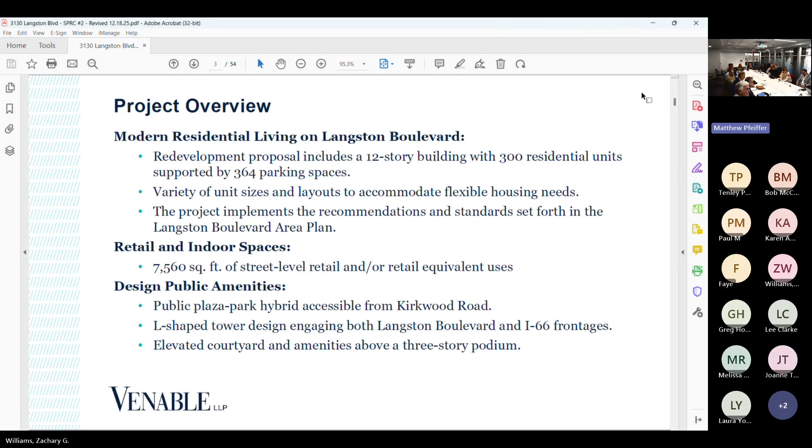The project hasn't changed much in terms of the overall scope. The number of units has come down a little bit, down to 300. Mostly everything else is the same. There's obviously some changes we'll talk about tonight, but the overall programming of the project has not changed much since the last SPRC.

The agenda tonight: we're going to quickly work through our building and architecture changes. Could you adjust that so we can see the top of the slide? Hold on just a second. Oh, I think that did it. Okay, can everybody see that?

So we're going to work through the building and architecture changes quickly. We'll then talk about landscaping and some of the changes to the Plaza Park hybrid. We'll get into transportation, stormwater overlay relief, and then we'll have a staff presentation. We'll also have questions and discussion and conversation.

So getting into architecture, I'm going to turn it over to Steve Saff at DCS Design to discuss architecture changes.

One of the major things was stormwater, which required us to shift the base of the building on the east side over by about 10, 11 feet, which forced us to look at the circulation in the garage and push the North Kirkwood side out further to the south.

Another major thing is stormwater management, to get all the retail lobby and everything along Langston Boulevard to be at the same elevation, which created a situation at the very northeast corner of the building where we had to provide steps, and then ramps both along Langston Boulevard to the west, and a ramp going down to the south off the corner.

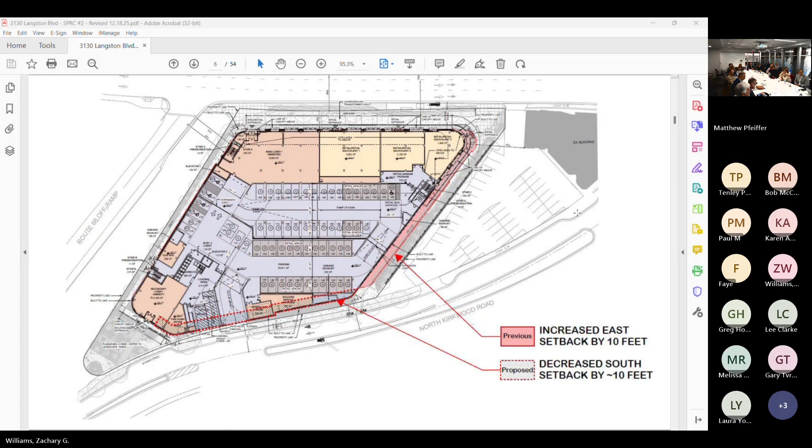Again, a lot of the architectural images have not changed much. You will see the biggest differences at the base of the building along Langston Boulevard and the facade along North Kirkwood.

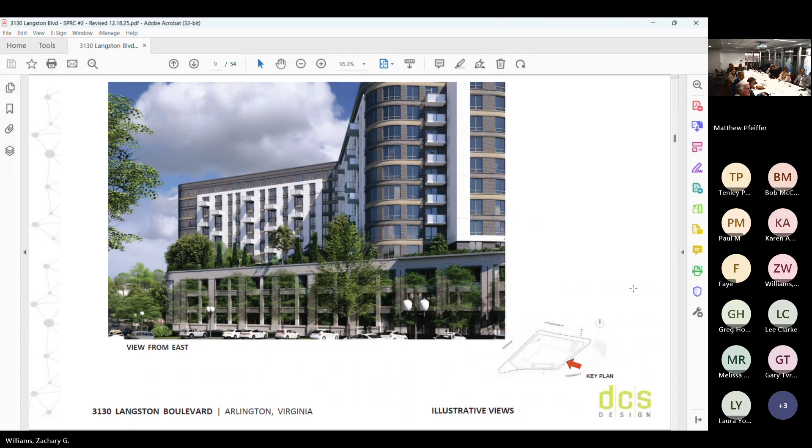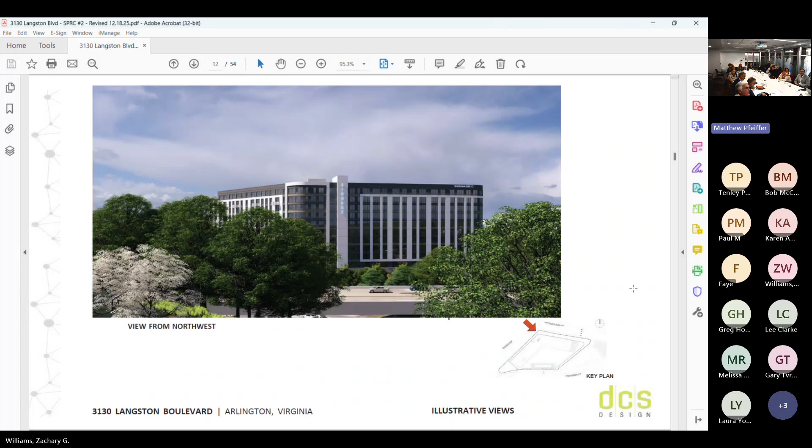Just looking from the pawn shop site to the west, east elevation. And that's just looking from the pawn shop to the southwest, at the intersection. Keep going through most of the images you've seen.

This is the changes to the North Kirkwood elevation. Really the whole building, the base of the building, the architectural style, the articulation, and the treatment of the materials carries around the whole building, so really there is no back of house on this design.

There is a step in the building, shifted back. We tried to push it wherever we could to get some articulation of the side, and we tried to treat certain areas a little differently in the opening. So we do have glazing back there, but we also have decorative screens, artificial greens, and other things to give the whole south elevation a different look.

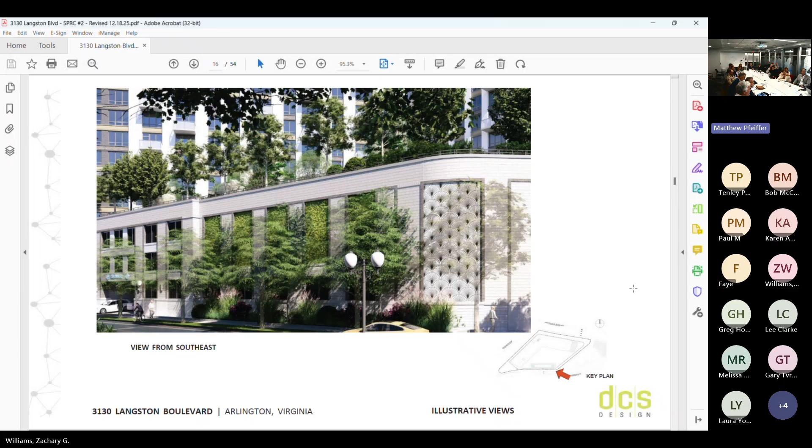That's a change as well. Here you can see at the very northeast corner, that's going up to the retail. The steps going up, a difference of grade of about 30 inches there - so that's obviously a big change.

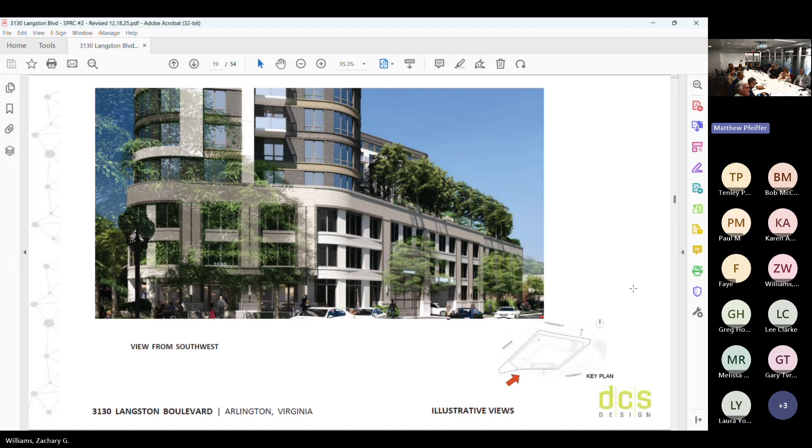And that is the southwest corner, with a change there. And then that's the other lobby on the North Kirkwood side. This is looking at the elevated courtyard. Andrea will talk about the plan design.

This is just the retail from the lobby to the north looking east. I think the change you can see here is that elevation - there's a really loud air handler in this room, so you can see a change here.

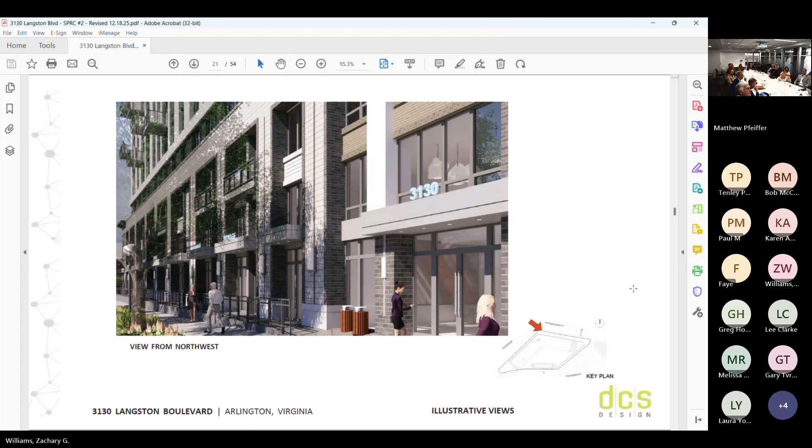Just to point out that ramp - it starts at the lobby and then works its way along as the grade drops to the east.

Basement level garage. Ground floor, all retail lobbies to the north, and then at the very bottom corner is the other lobby, the secondary lobby.

Typical parking level, and you can see that the hatched area is where you have a double height space for retail along Langston Boulevard.

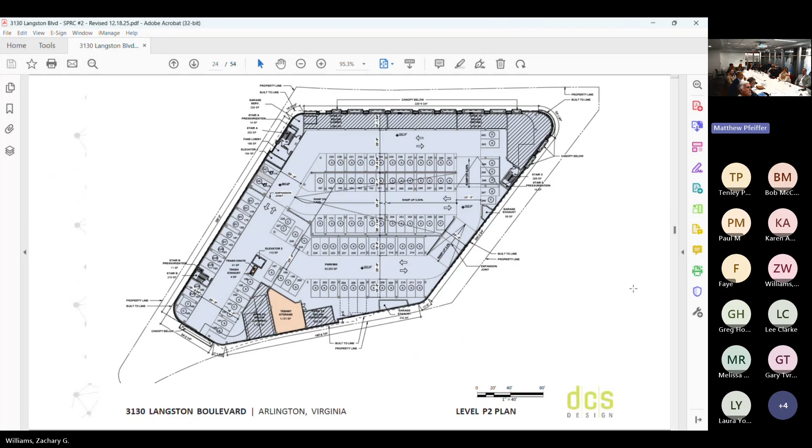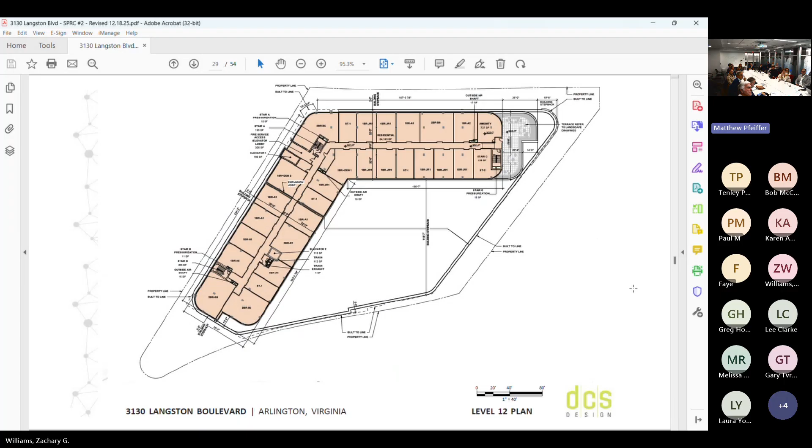Top level of parking - it's the elevated courtyard level and amenities area. Typical level, typical level, and then one last slide where you have the terrace at the very east corner, stepping back.

All right, turn it over to Andrea. Sit in my place.

A decent amount of the architectural changes came from civil improvements that Mike will also be getting into as well.

Hey everyone, I'm Andrea Crossett with Land Design, landscape architect on the project. So this is an overview of the project - you can see it's very green, but I'm going to stay mostly on the stuff that has changed since the last SPRC. You can see the key concept notes here.

One of the things we heard during the last SPRC is that the Plaza Park hybrid felt very disconnected and not integrated, so we worked on a new design, which I'll get to in my next slide. You can see street tree layout revisions along Langston and North Kirkwood, which, like Cassie just said, are really civil and stormwater management related, so we had to adjust some things as we responded to those changes.

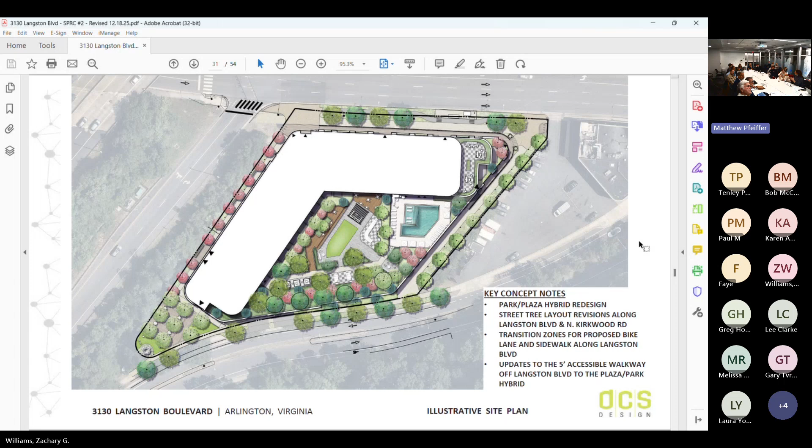The plaza level 3 design hasn't changed at all. But the other thing we heard at SPRC was that the northwest side, or the whole west side, that connection from Langston down to the park felt very tight. It felt too lush, like there was too much going on in the views. So we tried to adjust that a little bit, and you'll see in the views we also provide lighting imagery to show that it's going to be inviting and welcoming.

So the Plaza Park hybrid - what we heard was it felt very much like against the building was Plaza, and then it went to park. We tried to integrate those elements where, it's a 5,000 square foot space, so it isn't a lot, but we wanted to make sure we had enough for everyone in terms of all the requirements per the Langston Boulevard area plan. We introduced a bosque, so we increased tree canopy through the bosque design, revised accessible pathways with revised planting layouts, additional seating, areas for refuge. We'll get into the levels and ramping and why that happened, but this is just a response to that feedback. We made sure there were areas for open lawn, for open recreation. There's a little sculpture at the southern west point, and increased lighting and safety throughout, which we'll show.

What is a bosque? A bosque, you can see that very geometric shape - that's just a landscape term. You'll see it in places like New York, Bryant Park, places that are very urban, but you're trying to get as much landscaping in and integrate both the hardscape and landscape together.

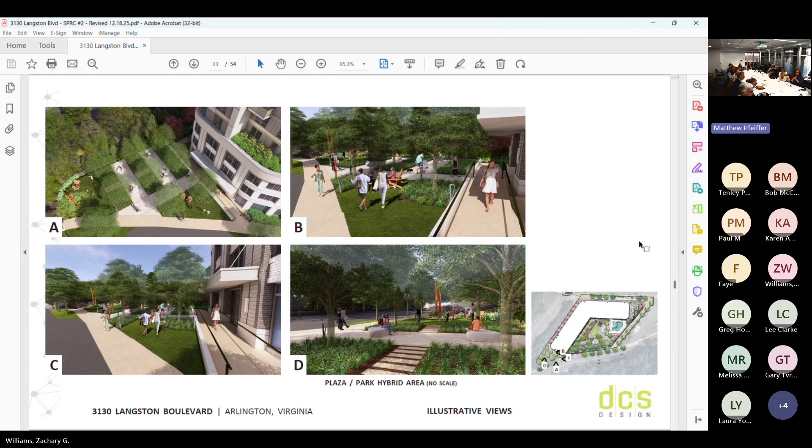In these views, it's a little dark, but these are just updated views showing those spaces where, in the lower right-hand image, there are areas for you to sit, to recreate, to gather, to stay, to play. We tried to integrate as many items as possible per all the requirements of the design guidelines. Again, making sure it feels welcoming and well lit. Something we also have to do, because it is a public space - it's privately maintained public space - is make sure it feels welcoming, that you can come anytime, at dusk, walk your dog, things like that.

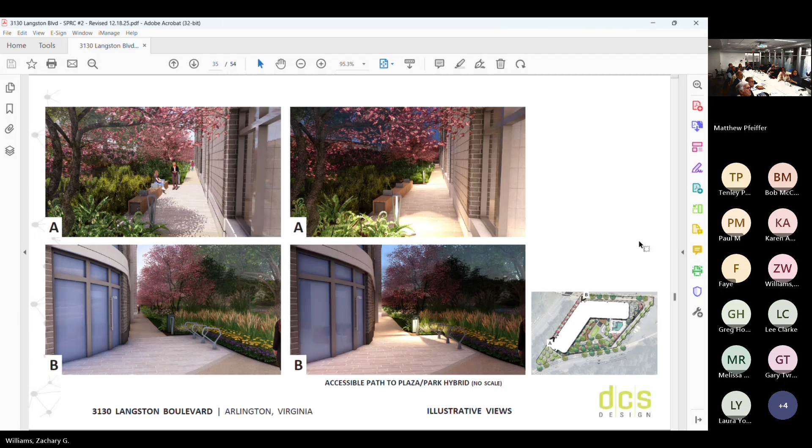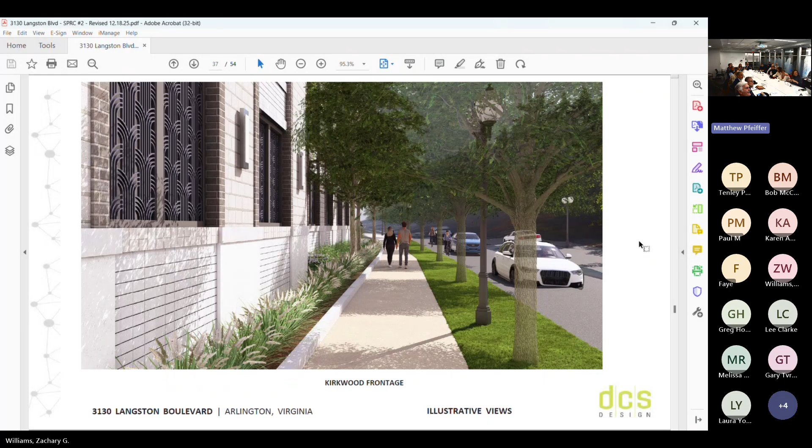These are some images from when we were speaking with Jackie and folks two days ago, making sure we brought back some of these same images that haven't changed - this is the North Kirkwood side with that textural demonstration Steve talked about just a few minutes ago. Again, same Kirkwood frontage, showing the greenway, which we can - I'm not going to get into any of the storm management.

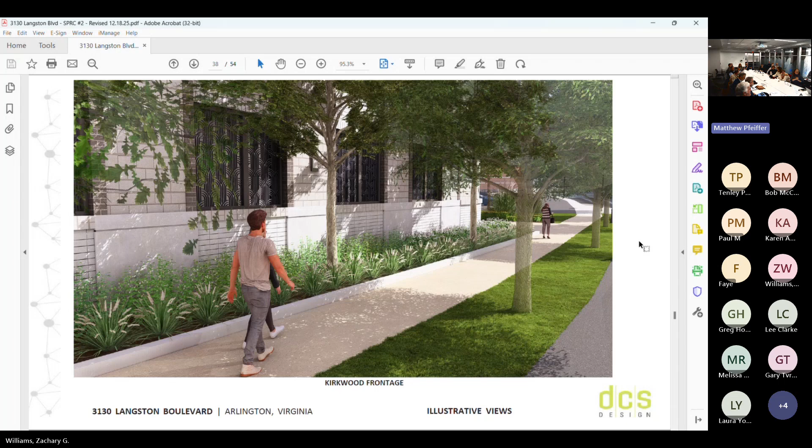I'll leave that for you. Okay. I'm really sorry with this pen.

I'm Mike Pinkowski again with VIKA. I just want to reorient everybody from an access perspective. The blue arrows represent the existing access points. Today the site has 3 access points: 1 on Langston Boulevard, 2 on Kirkwood. The eastern, or road right, access point on Kirkwood is where the existing median break is today.

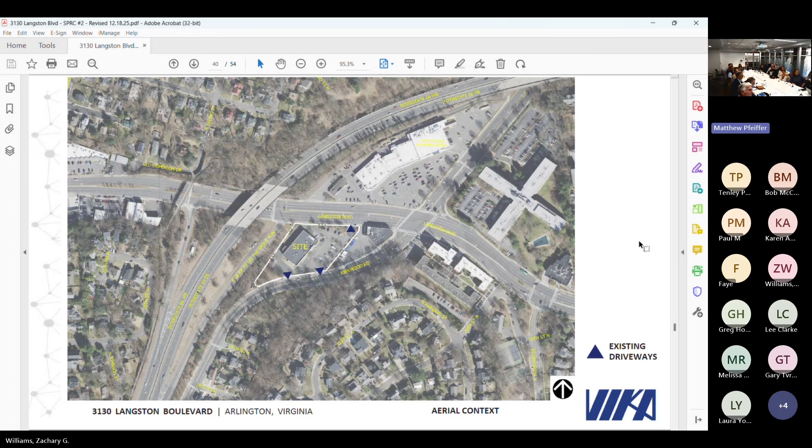The next slide highlights some of the multimodal infrastructure that's being implemented.

Starting with number 1 in the bottom left, that's where the proposed driveway location is going to be. We're going to consolidate the 3 driveways to a single access point. The red triangle represents the loading dock, and the blue represents the access to the garage.

At the I-66 off-ramp, we will be providing new ADA accessible ramps at that location. Number 3 represents the improved and planned Langston Boulevard streetscape.

Number 4 is an improved bus stop. There is a bus stop there today; we will be adding a shelter at that location.

Number 5, the number that's kind of floating off, there's an existing utility pole in front of the pawn shop. We'll be bringing that down with the development to improve that very narrow sidewalk today. It's very tough for anybody to even get by because of that light pole.

6 and 7, and Andrea kind of touched on this, represent the north-south connections, sidewalks and buffers along the boundaries of the property.

Number 8 is the streetscape along Kirkwood, and we'll get into the sections in a minute.

Number 9 represents the PU/DO parking spaces that will be provided with the site. I know there's some concern about the number of spaces. There's an opportunity to potentially add another space underneath, but it would come at the cost of a tree in that location. I'll also note that while it's on the other side, there's about 16 parking spaces on the north side, northbound side of Kirkwood, and then along the pawn shop property southbound there's an additional 4 parking spaces.

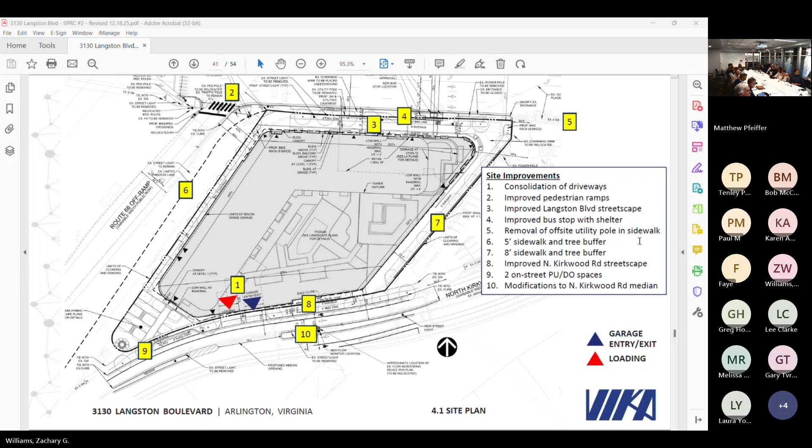I guess a question - can we hold all questions until after they do their presentation?

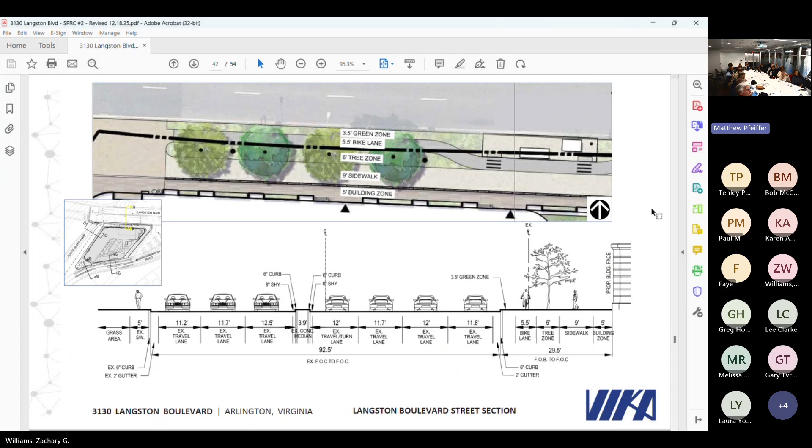This is the Langston Boulevard streetscape and plan view on the top, and then a section on the bottom. The section on the right-hand side is our side of the street: 5-foot building zone, clear sidewalk, tree zone, protected bike lane, then a green zone between the bike lane and this.

We're not adding traffic to either of those movements. As part of reviewing the timings of that intersection, we did identify an opportunity to optimize the traffic signal timings to help the overall delay of the intersection, mainly giving more time to that eastbound left on Langston Boulevard, so it can help process the heavy left turn, especially in the PM.

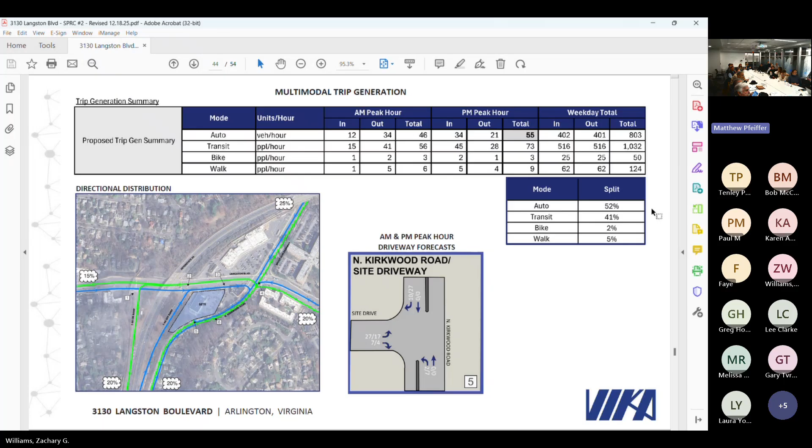Again, that's another opportunity for pickup drop off - the Ubers, the Uber Eats, the pizza guy. If those parking spaces on the street are occupied, they could pull into one of those spaces. The garage won't be gate controlled at the access point, so they'll be able to come into the garage.

We're meeting the parking requirement for bicycles, both secure parking and class 2 or 3, the ones surrounding the site. We will be providing 2 loading berths; there is a requirement for 3. A third is kind of related to the retail component, but we believe that given the uses planned, that two spaces should be adequate.

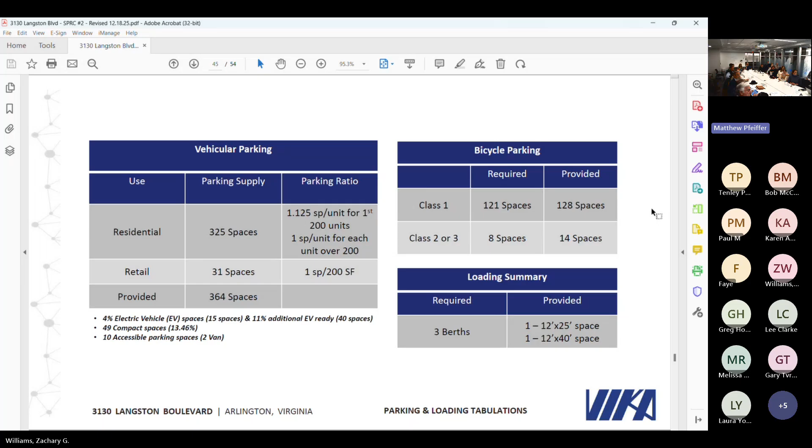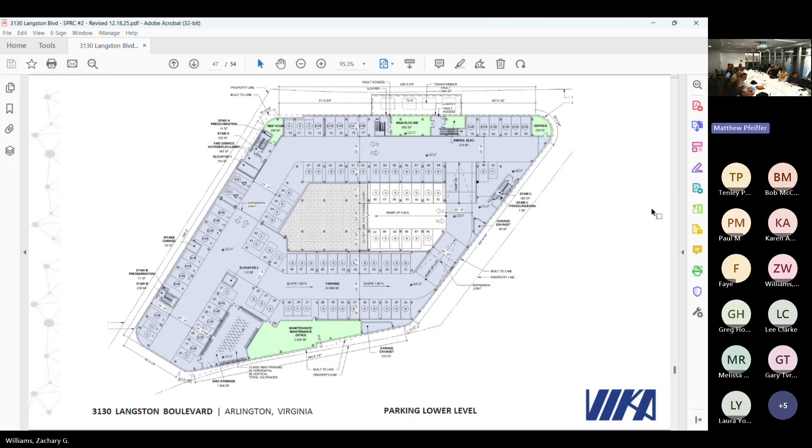And this is the lower level. I just wanted to show this again. On the bottom left, that's the big secure bike parking area for residents, and there is an elevator in close proximity to it.

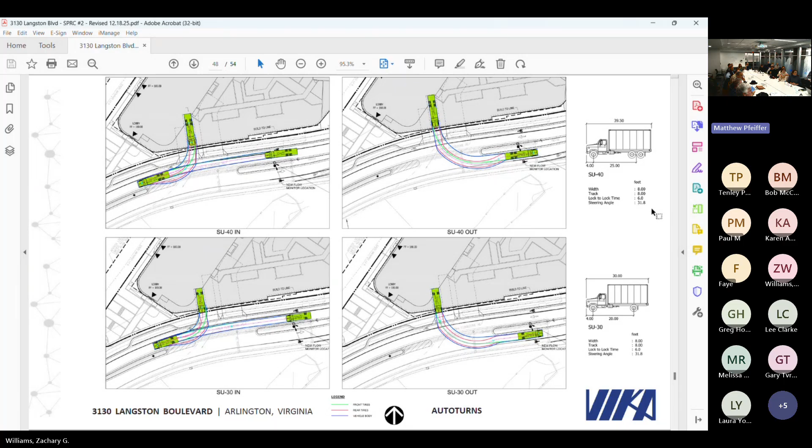And the proposal will be subject to a transportation demand management plan. These are the typical requirements that are laid out in the standard conditions, and we will work with staff post approval to implement a plan.

Thanks, Andrea. I appreciate it. Hi everybody, my name is Chris Champagne. I'm an engineer with VIKA, and I promise I only have 3 slides. But I do want to talk about 2 very important topics: one is stormwater management, and the second is flood mitigation and overland relief.

The first slide is simply a discussion about stormwater management, how we're going to deal with our water on our site. I'm talking about the water that falls from the sky, lands on our property, and how we treat, detain, and control it prior to releasing it into the stream, Chesapeake Bay.

The site obviously is developed today, but what we're trying to do with the new development is use what we call runoff reducing stormwater techniques. So we're going to try to grab that water, hold it and leave it here locally, let the plants take it up, let us use it on site and not discharge it immediately into the stream.

So you'll see some green roofs that Andrea helped me with. Andrea and I worked hard, you make pretty green roofs work for stormwater management. And those areas that we had to have a harder roof, we use what we call rooftop disconnection to a stormwater planter. So Andrea and I were working together in the orange areas and the green areas and the light blue areas to capture and treat the rainfall that actually falls on our site.

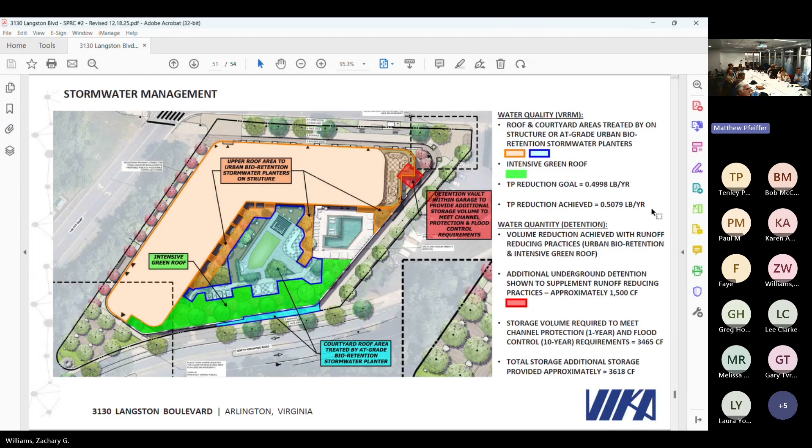So there's a series of culverts that start at Kirkwood that go under the pawn. One of them actually physically goes under the pawn shop. The other culvert goes right between the pawn shop and us, goes under the parking lot at the Giant, down Spout Run Parkway, and takes it to the Potomac.

So that 830 acres is what we have all been working on together. I'm taking all the credit right now, but they really worked hard to help us find a solution that could work not just for our project, but for the community at large. So what we were able to do when Steve magnanimously allowed me to make his building a little bit narrower is we were able to create a 20-foot wide, almost pathway for the water.

So what we've done by narrowing our building is created an opportunity for that water to safely get through. We've also, thanks to Andrea working with the landscape plan and Cassie with a wallet, put in an 8x8 box culvert. So this is a culvert that's taller than me and wider than me, that's going to sit under that 20-foot wide pathway so that we can extend the culverts in the future, expand the capacity of the culverts to handle that water.

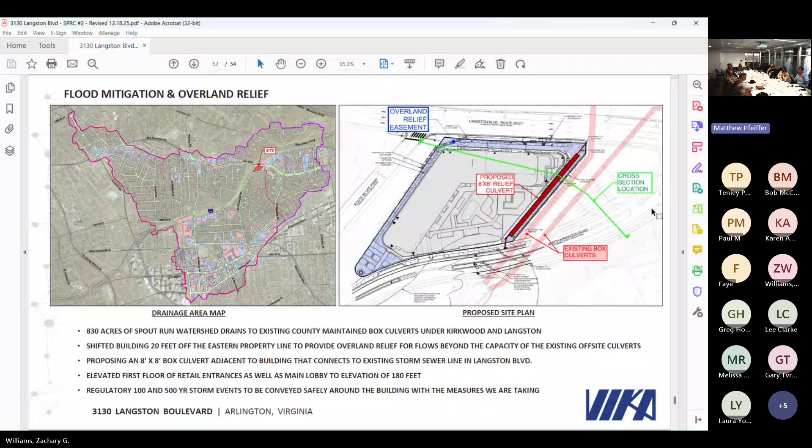So we've done everything that we can to work with the community to try to create a building that can work today and work in the future.

So I kind of batted last as the last guy going, but it was really all those guys who got on base who allowed me to deliver the speech today.

But if you guys have any questions, I'll be here.

Did you want to mention, Chris, that this also shows the culvert in that area? Well, I thought it went without saying because it was big and red, but yes - underneath, that's the 8x8 box culvert underneath the site.

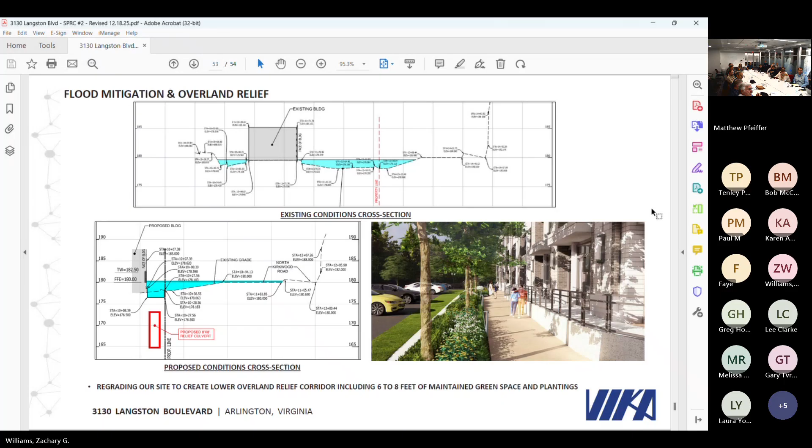Yeah, we'll take questions in a minute. Staff... yeah, because everyone wants to be architect.

All right, sorry about that. Give this a second to correct itself. We'll get to questions in a second, guys. Let's let Mr. Pfeiffer do his presentation.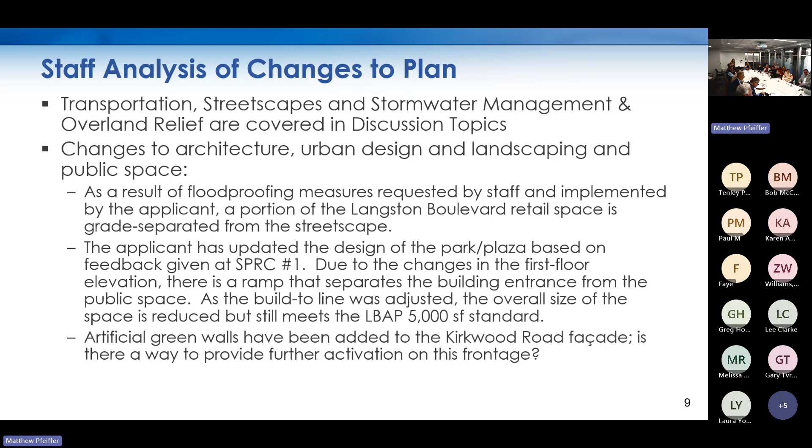And then finally, we did notice that the artificial green wall has been added to the Kirkwood Road facade, and we just ask, is there a way to provide a little bit further activation on this facade? We understand that this is the parking garage—they've done a lot of things, including decorative louvers and these green walls—but we'll keep working with them on that.

And then this slide sort of illustrates those points here. You can see the green walls on the Kirkwood frontage. You can see here this ramping system at the park, with a small seat wall that separates the park from the ramp and into the lobby here. And then finally, this is a little bit small, but you can see there are stairs up to the 180 feet of elevation at this retail corner.

So before we get into the discussion topics and I hand this over to Bryce, I wanted to tie us back to the online engagement that we did almost a year ago and just repeat some feedback that we've already heard related to these three discussion topics that we're going to have tonight.

So on stormwater management, we heard from SPRC members that they were looking for a little bit more clarification from staff on whether they are in conformance with the recommendations of the Langston Boulevard Area Plan on overland relief. We're happy to talk about that this evening. From community members, we heard a common refrain that consolidation could help solve some flooding issues. We also heard that there was a concern that the 50-foot required overland relief corridor was not provided. And then we also heard general concerns about flooding in the area, acknowledging that it's not necessarily a Rooney issue as much as it is an Arlington County issue.

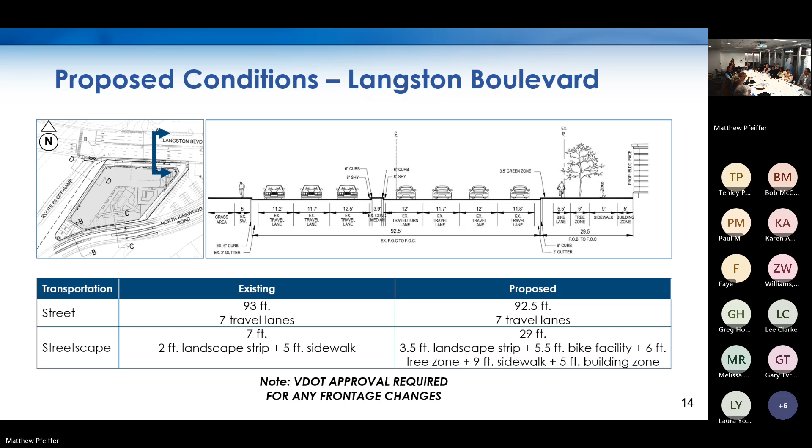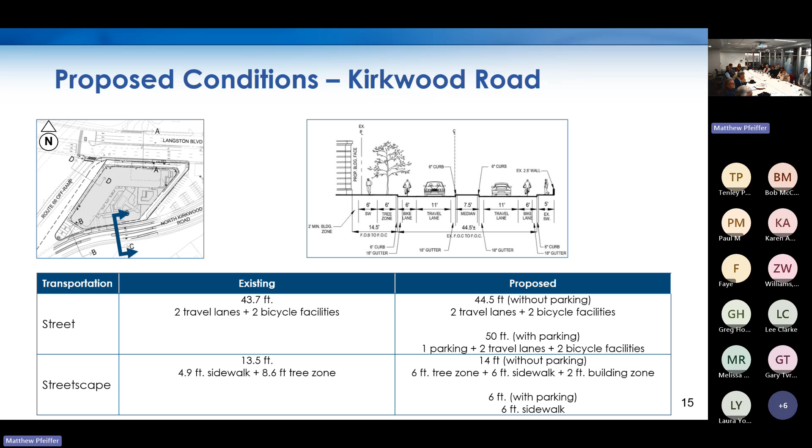This led to an extensive design process where the applicant worked with staff to assess the site's existing and proposed conditions under the 100-year storm—that's the 24-hour period with a 1% chance to occur in any year. Based on the county's stormwater modeling under existing conditions during the 100-year storm, stormwater flows downhill along Kirkwood and through both the site and the neighboring site, then onto Langston Boulevard.

The area plan anticipates that new construction would consist of a single new building across both this site and the adjacent site, with the greenway provided to accommodate the new flow path for that building. However, the applicant does not control the neighboring site, so the proposed building and resulting path are different than originally anticipated. The applicant worked with us to evaluate the flow path for the new building and determine how to best provide on-site mitigation they could deliver themselves.

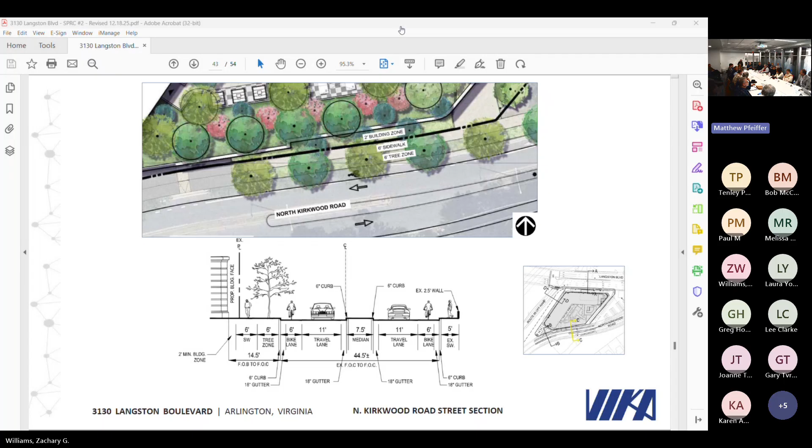Karen, you have a clarifying question? Hi, it's Karen O'Donnell from the Disability Advisory Commission. I have many, but I'll ask one: could you address accessibility for that elevated ramped area and the area with the steps?

Are you talking about along Langston Boulevard? Yes, the 180 feet, and the retail that is ramped. The ramp starts where the lobby at the very northwest corner is, and then it's pretty much flat all the way along Langston Boulevard. There's a set of stairs that go down at the very northeast corner where the major retail entrance is, and then as you turn the corner, you go about 20 feet and there's another ramp that takes you down along the east side of the building.

So if I'm in a 400-pound motorized wheelchair, that will be accessible for me? Yeah. Okay, thank you.

And Eric. I sort of want to follow on with that from the pedestrian perspective - is it possible you can show us what that looks like? And also I wanted to know, on the west side from that new park area all the way to the retail, is that a public sidewalk or a private sidewalk to the entrance where the retail is? It's a public sidewalk, the sidewalk's public.

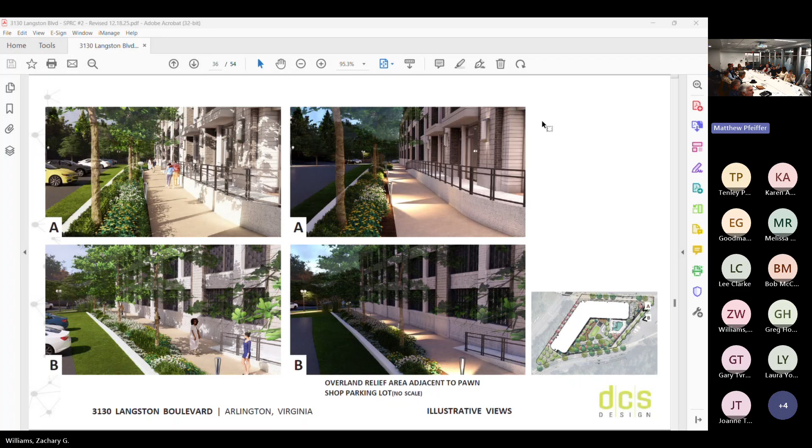Right, last clarifying question. Jackie, you had one more? When you were talking about the plaza, you said you could walk at dusk and it was going to be lit properly. I want to make sure the lighting is at that location and not projecting out. And the second thing, you said almost as an aside that you could walk your dog at dusk, and that scared me because this is not a dog park. Just meant anybody who is walking - okay, but there's no dog park. No, it just means you can walk. Okay, just wanted to confirm that.

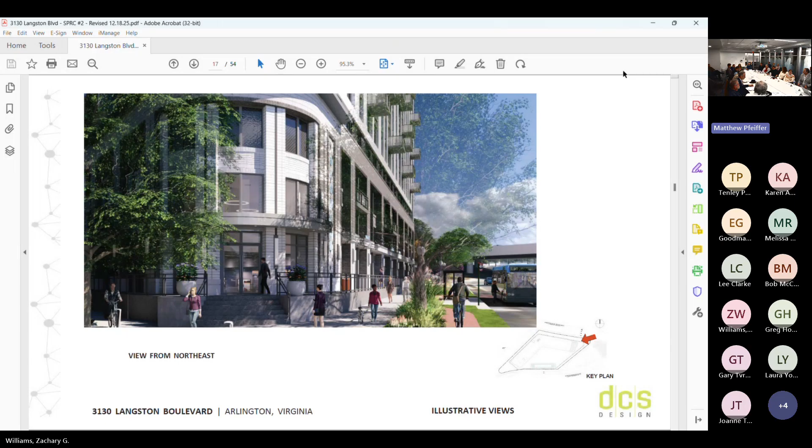Hey, this is Laura, I have a clarifying question. Excuse me Laura, who are you representing? I'm part of DRCA, a civic association. Unfortunately, only the four abutting civic associations are represented here. You're certainly welcome to make any comment or question during public comment - just write that in the chat. But for discussion purposes, it's just the members at the table now. Thank you, Laura, added you to the public comment list.

All right, so questions regarding stormwater management and overland relief. I just want to comment, having chatted with Matt over several months - I'm also the SPRC chair, so I'm also chairing this one. It's my understanding the time and money spent by the applicant, they came up with five different plans of options to address a very important topic for all of us in the county. I want to commend you for doing that. So, questions, comments, concerns on stormwater management and overland relief.

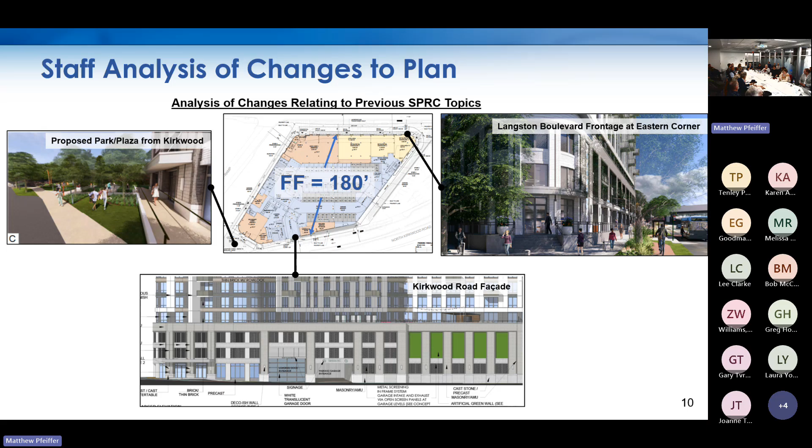But by putting that vault there and by moving the stormwater overland relief to that area and giving an easement, my question was: does this mean that in the future, if the county wanted to enlarge the capacity of that pink culvert - that's the culvert on the left - that the county would be able to go in and do county mitigation to increase the capacity of that culvert? The answer I got from Venable was yes.

So it wouldn't just be increasing - well, I guess it is increasing capacity, because we would want to extend it, so that way the actual storm system can handle much more than it can today. I mean, you could get in and enlarge that culvert now, whereas before you wouldn't have been able to.

That's all, final question. Oh, I'm sorry, this is just for my knowledge. I was curious, and I don't know if this is for the applicant or the county, but if this area, worst case scenario, floods, the building basically becomes an island.

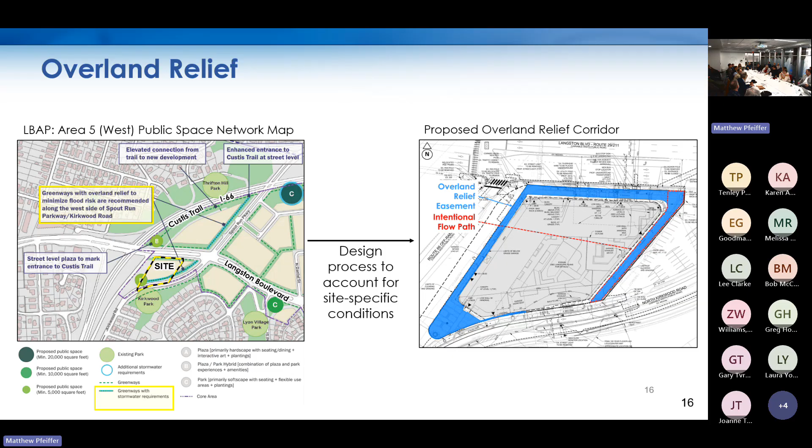Stop, I mean, yeah, it's okay, I just want to know. That's part of the overland relief easement language we've been discussing with the applicant. Again, that's worst case scenario, during those more intense storms. The actual degree those storms have, the period of rainfall, like Chris was saying, could be anytime within a 24-hour period. If it happens all at once, it can be really extreme. If it's spread out over the course of a day, a bit less extreme. However, residents, retail visitors will be aware, per the pending site plan conditions, that there is the potential for that.

I was just curious. All right, transportation, parking and loading. My question is about transportation, but regarding community benefit related to transportation. Should I ask that now or wait till community benefits? Get it, transportation. Yeah, I think we all... Trying to play by the rules, yeah. Thank you, that's very good. Follow his stance. So let me pose the question then, if you want.

Yes, later, okay. So my question is this: as I look at the community benefits related to transportation, I'm concerned that they are primarily at the site, benefiting your ability to market to future tenants the goodness of this property, but they're not really helping the larger community. One thing I would like to propose and ask is what transportation related community benefits would you be able to provide that would actually help the greater community? As an example, the Custis Trail is very close to your site, and in both directions, it's a mess.

It needs to be redone. A lot of people who live in that building will use it. A lot of people in the immediate community of these four civic organizations use that Custis Trail. It would be an enormous community benefit, in my opinion, if Rooney would address fixing the Custis Trail in both directions, from some distance of the site, to make it better and useful for all these users. And again, going back to Mr. Pfeiffer pointing out that he wanted to hear a prioritization from us, so thank you.

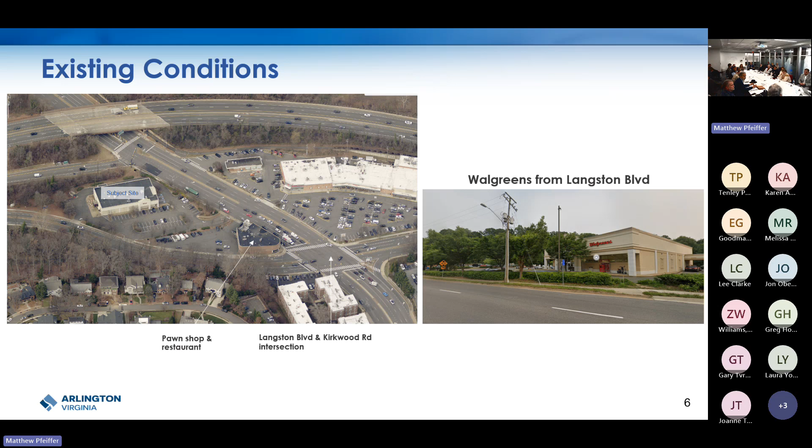The other one real quick, based on Lucky Gardens, we have no bus service. So you're putting in a bus thing on Langston - there's already a bus stop there. The bus stop, I guess, is ART 55. So ART is the only transportation there, but not Metro. Right.

Okay, so I'm going to move us on, but go ahead.

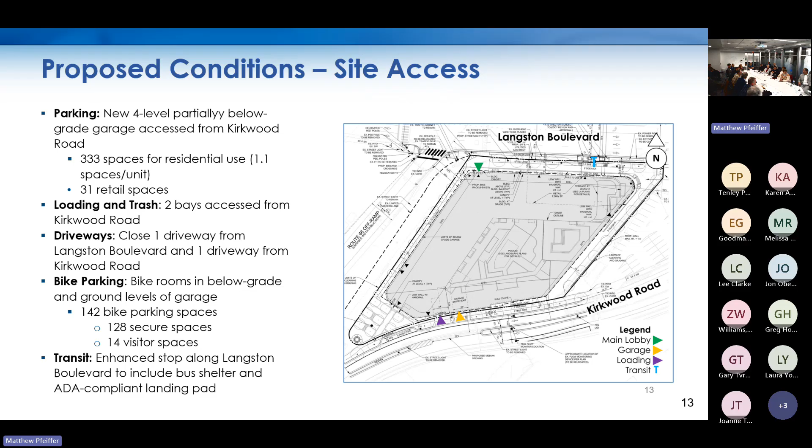Charging for electric bikes, and we'll look at the parking spots. We'll follow what the demand is.

Say one thing. I understand that there's a lot of concern about the transportation safety here. Staff is well aware, I've talked to staff about this, just trying to keep up to date. I do want to say that I appreciate continuing to hear the feedback, and I hope you all continue to be engaged with staff through the other venues that you already have. So I just wanted to again say thank you.

All right, so let's move on now to streetscapes.

Is this a question time or a comment time? Well, we've passed the clarifying questions. We're into comment debate. Nice, civil.

Sure, of course, always. So I'm with the Forestry and Natural Resources Commission. I want to remind everybody, as I always do, that there's a Forestry and Natural Resources Plan. It has a 40% tree canopy coverage target. We are well below that target, and we are not making progress toward that target. In addition, the county has recently prioritized climate change, and we've been talking all night about stormwater impacts and 500-year storms and things like that. I would also point out heat islands. And so I think trees are an essential part of the solution for these problems.

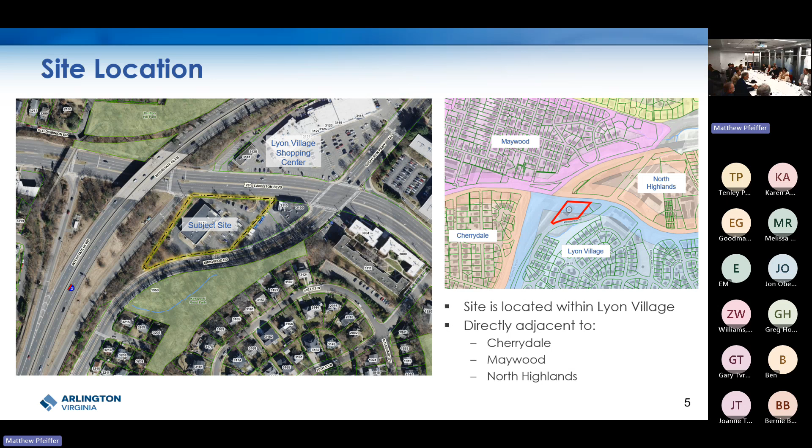With the 35% coverage, what portion of that actually is on the terraces and matches? You're only talking about a site that already has 81% impervious surface, so it's kind of hard to see. And the terraces are not going to be able to really sustain the types of trees that really add the most benefit to the community. They have a nice amenity, they do something, but it's big, tall canopy trees which is what we're really missing.

It's hard to hear you back here. Yeah, I was just saying that with a 35% tree canopy coverage, a good portion of that, I think, has to be the terraces, because you've got 81% that's impervious surface. And it's really the canopy trees that are the most important in terms of carbon sequestration and cooling. So whatever they put on the terrace isn't really going to count toward that, and, as Tenley said earlier, what size trees can actually really be supported in that type of environment where you're not going to be able to have the type of soil volume that you get if you're planting something directly in the ground. It would also be helpful to know whether you've done estimates in terms of what the reduction in the urban heat island impact is for the designs you're providing.

And would again reiterate that it's important to be compliant with dark skies and use downlighting so you're not adding to pollution, and also important to select lights more on the yellow amber scale, which are more beneficial for the insects.